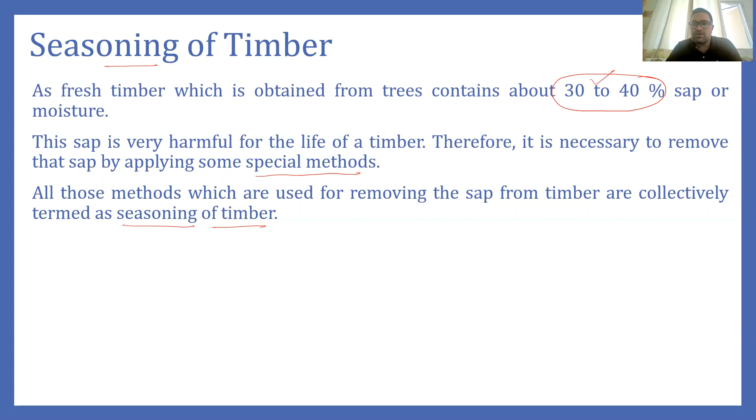So to remove this moisture, we apply some special methods. The process of removing this moisture is actually known as seasoning of timber. Seasoning of the timber can be done in two ways. It can be done in a natural way or in an artificial manner.

Naturally, what we do is we stack the timber logs in this manner from the ground, such that the air can be circulated through the timber logs. We keep this timber stack in the open ground, and when the air circulates through it, seasoning happens. For complete seasoning, it takes 3 to 4 months, and because it takes a lot of time, there are some other methods also which are known as artificial methods.

In the artificial method, one of the methods is called kiln seasoning. In kiln seasoning, there is basically an airtight chamber in which we put timbers in a stack, and then hot air is blown to that stack, and through that hot air, the moisture is removed. Generally, artificial seasoning takes around 4 to 5 days. So it is a lot of time saving, and the seasoning done by the artificial method is also very effective.

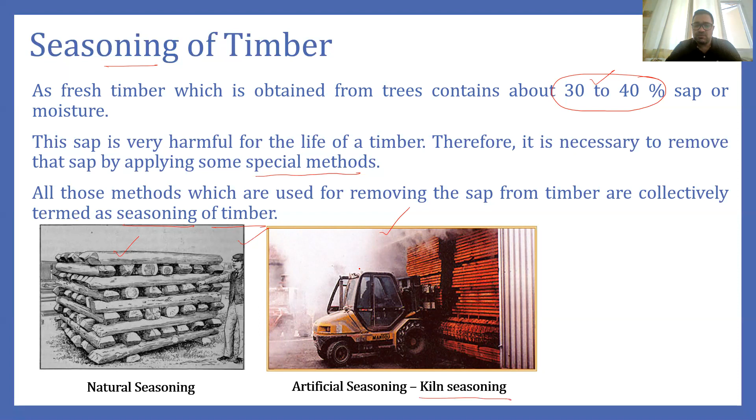Another method which also comes under artificial seasoning is electric seasoning. In this, timber is subjected to alternating currents, and through these currents, the resistance of the timber is measured. When the resistance of the timber is maximum, we consider that the seasoning of the timber is completed. So that is all about the seasoning of the timber. Seasoning of timber is very important from the point of view of strength: lower the moisture content, higher will be the strength.

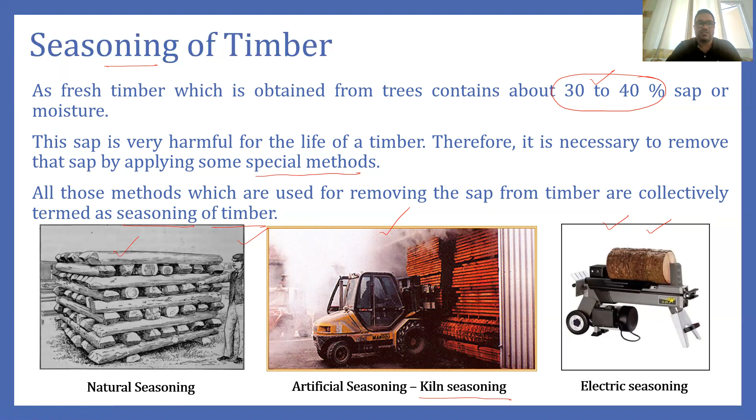Now coming to the classification of timber. Timber can be classified in various manners, and there are basically three bases on which we will be classifying the timber. One is on the basis of mode of growth, the second one on the basis of modulus of elasticity and extreme fiber bending stress. This second classification is most important for us for timber design, and the third classification is based on the seasoning characteristics. So first we will see the classification of timber based on growth.

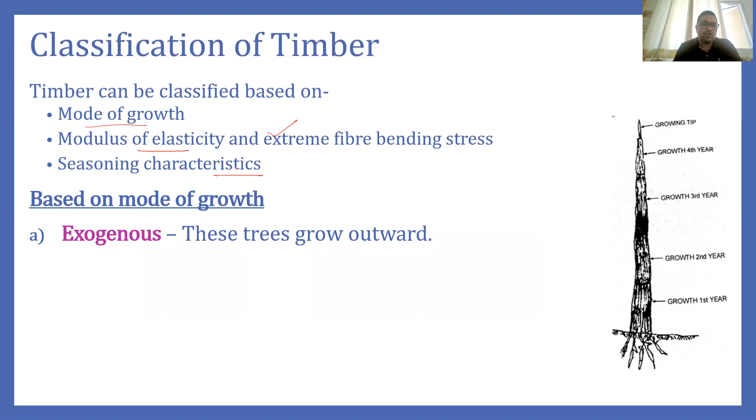Based on growth, there are basically two types of timber. One is called the exogenous tree. In the exogenous tree, the tree trunk grows outward, which means every year it grows in terms of annual rings. In the timber cross section, we have seen that there are very fine small rings. Those small rings are known as annual rings, because these rings form after 1 year. So when a tree grows outward every year by the addition of annual rings, that kind of tree is known as exogenous.

Exogenous trees further have two categories. One is called the coniferous tree and the second one is called the deciduous tree.

Conifer trees basically have softwood. Their wood is very soft, light in color, and the density of the softwood is very low. Similarly, the second type of tree is the deciduous tree, and these are the hardwood. Their appearance is dark and their density is high.

Well, if we talk about the coniferous tree, these are also known as the evergreen tree because their leaves don't fall, and also their leaves are narrow and pointed. And examples of conifer trees can be deodar tree, kail tree. So these can be the examples of conifer tree, mango tree.

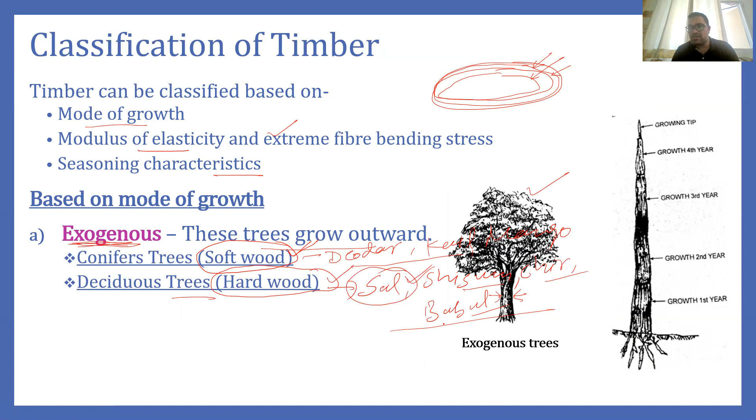an exogenous tree looks like this. In this you can see the stem. This stem grows annually by increment of the annual ring. Now talking about the next type of tree, which is the endogenous. Endogenous trees are the trees which grow inwards, which means at the start, as you can see in this example of an endogenous tree, the stem is thicker, and as time increases they grow upward, and at the same time their stem decreases. You can see here their stem decreases.

So this kind of growth is called inward growth, while in the case of exogenous the growth is increasing. Therefore the stem is bulky for exogenous trees, and for endogenous the stem is very light, very thin. Examples of endogenous trees are bamboo, canes, sugarcane, and palms. So this is the classification of timber based on the growth.

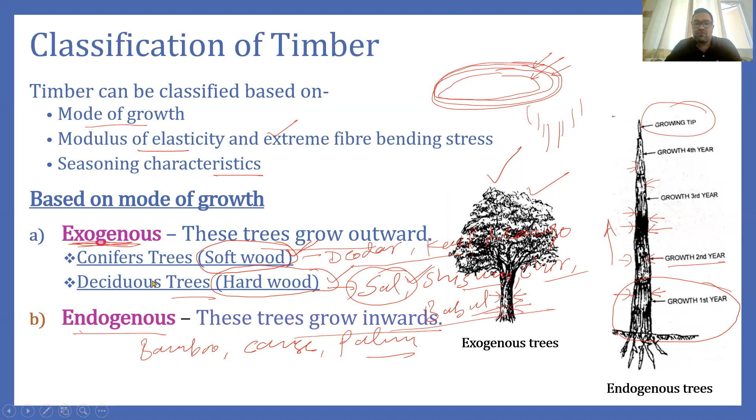Now we will come to the most important classification of timber from our point of view, where timber is classified based on its modulus of elasticity and the extreme fiber bending stress. Based on this we have three groups. One is group A. In group A, timbers having Young's modulus of elasticity higher than 12,600 Newton per mm square, and a value of FB higher than 18 Newton per mm square, are classified as group A timber.

Similarly, timber in the second group will have modulus of elasticity higher than 9800 Newton per mm square but lower than 12600, and that comes under the category of group B. Also the value of FB will be between 12 to 18 Newton per mm square. Similarly, group C has Young's modulus of elasticity more than 5600 and less than 9800 Newton per mm square, and the value of FB is between 8.5 and 12 Newton per mm square.

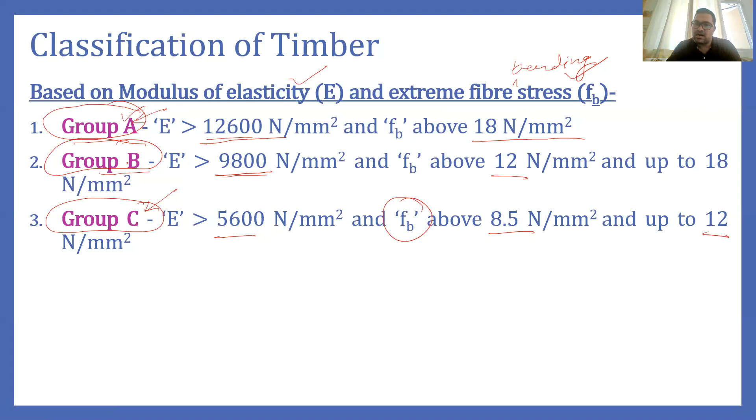So the first class timber will be group A, second class group B, and third class group C. The weakest timber will belong to group C, and the strongest to group A, because the higher the Young's modulus of elasticity, the higher the strength and stiffness of the timber. Now, the third classification is based on the seasoning characteristics. Based on this, we have three types of timber. First is class A timber.

Now, class A timber is a kind of timber which takes a lot of time for seasoning. These timbers are very slow and difficult to dry if the final product is to be free from defects, particularly cracks and splits. So they take a very long time for seasoning.

Similarly, the second type of timber belongs to class B, and these timbers show a moderate tendency to crack and split during seasoning. So the second type of timber, during seasoning, cracks and splits. I mean the fibers within the timber show cracks and splits. So this kind of timber comes under the category of class B.

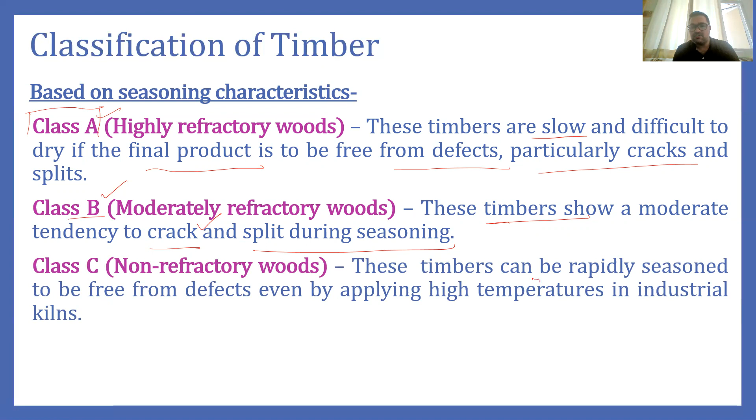Then we have class C timber. Class C timbers are timbers which can be seasoned very rapidly and are free from defects, even by applying high temperature in the industrial kiln. So they can be seasoned very easily, and they belong to class C or non-refractory woods. So that is the classification based on the seasoning characteristics.

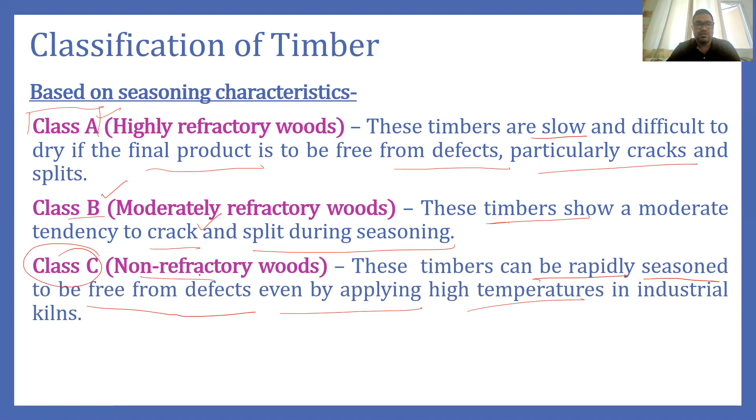Now coming again to a very important topic, and that is defects. Well, the strength of timber is affected by defects also, and there are various types of defects. Defects can be natural or artificial; during seasoning various defects occur which affect the strength. Similarly, defects can be due to termites, due to insects. So there are various types of defects, but here we will confine ourselves to some of the important defects which influence the strength of the timber.

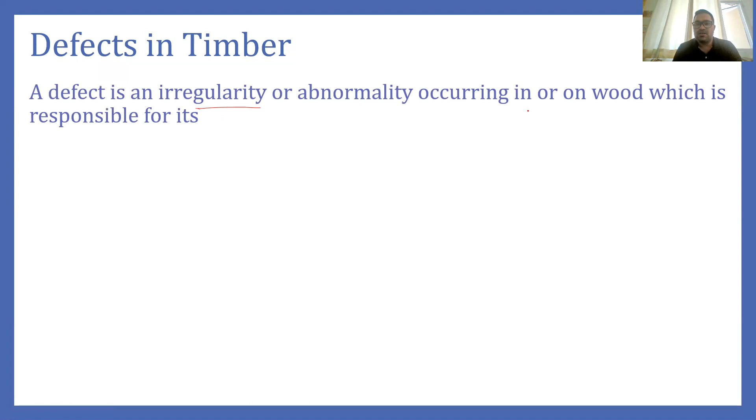So first we will see what a defect is. A defect is basically an irregularity or abnormality occurring in or on wood which is responsible for its strength reduction. Yes, defects reduce the strength, and they also lower the durability of the timber. They also lower the utility of the timber. It cannot be utilized properly if it has defects, and the appearance of the timber is very poor if it has defects. And defects are also responsible for the decay of the timber.

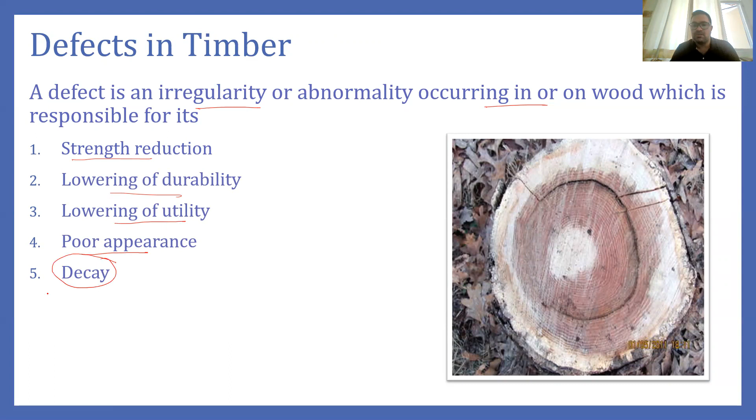So now coming to the first type of defect which generally occurs in timber. This defect is known as shakes. Shakes are basically the splitting of the fiber. The partial or complete separation between adjoining layers of tissues is called shakes. And you can see the shake here. So here you can see these are the fibers.

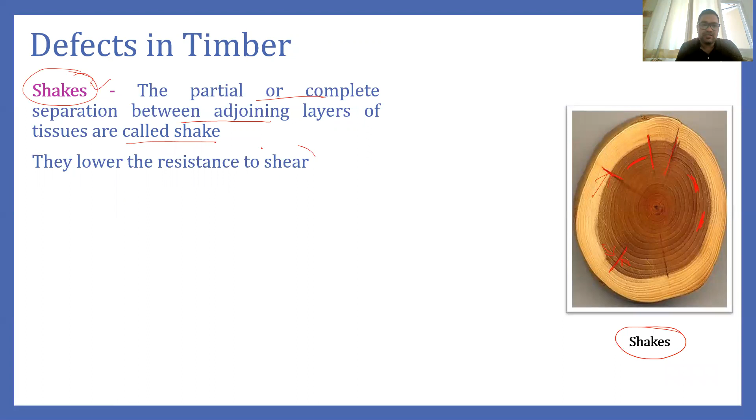So if there is partial separation like this between the rings of the timber; similarly, these lines are also shakes. In this you can see they are actually splitting this fiber along this line. So these are known as shakes, and these shakes are responsible for the reduction of the shear strength of the timber. So shakes affect the shear strength of the timber. So that is one important defect.

The second defect is the rindgall. Well, this defect occurs because, in the live tree, if any branch is cut in an irregular manner, then at the point where it is cut off, wood grows. You can see here, this is the branch and it is cut off from here. So what happens is the sapwood of the tree grows here, and it makes this kind of portion.

And this is very weak in strength, and therefore it is highly vulnerable to decay, because it can house various types of insects and various types of birds. So this portion becomes very weak. So that is also a defect, which comes under the category of natural defects. And this portion is called the rindgall.

Because of this new growth, which comes in the form of growth of the sapwood, it does not unite properly with the old wood which is already present here, which is broken because of the cut-off of the branch. So the new growth does not unite with it properly, and therefore a very important defect comes from this, which we will discuss in the next slide, and which is called knots.

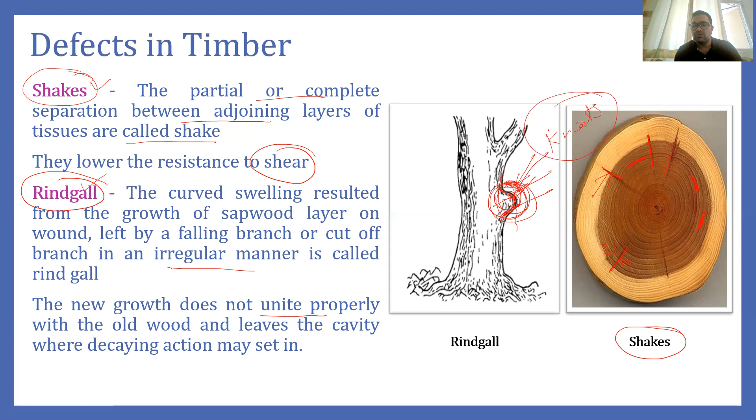So these knots are very much responsible for the reduction of the strength. We will discuss these knots in the next slide. Now, yes, as I said, we will discuss now the next defect, which is the knots.

And as I discussed how these knots are created, these knots are created because of the fallen branch in an irregular manner. So these knots here you can see, when you cut the timber irregularly, then what happens is the continuous growth is stopped. And because of this, this portion hardens because of the fallen branch, because the growth is stopped in this region. And some dark patches form here because of the discontinuity of the growth.

And you can see here, these are the dark patches. And even in the tree you can see this dark patch is basically the knot. And even this knot is present when we convert this tree into a piece of board. Even there also you can see the knot. Now this knot is very difficult to work out. Although this knot is very hard and compressive strength may be higher in this case, it actually makes working of the wood very difficult.

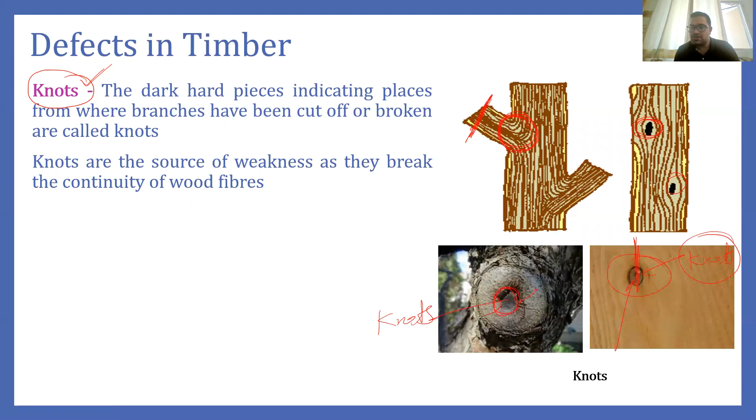Now what is the meaning of working? Working means it is very difficult to cut. If you want to cut from here, because this part is very hard, it is very difficult to cut, and therefore working is difficult in this case. So this knot is weakened.

This weakens the timber in tension. The tensile strength of the timber is weak because of the presence of the knot, but it may have strength in compression. So if you check the strength of timber in compression where there is a knot, it may show higher compressive strength, but the tensile strength of the timber is decreased because of the presence of this knot.

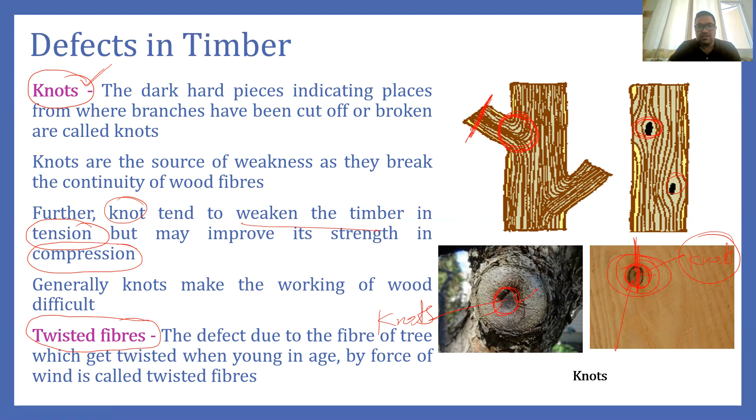So now the next defect is the twisted fiber. Now what is this twisted fiber? Twisted fiber is the defect which occurs in the tree. I mean generally in the forest, when there is a very high wind, or a very high force of the wind, what happens is some young trees get twisted, their stem gets twisted, and they are twisted at a young age. They grow in this twisted manner only, and the fibers of the tree also get twisted.

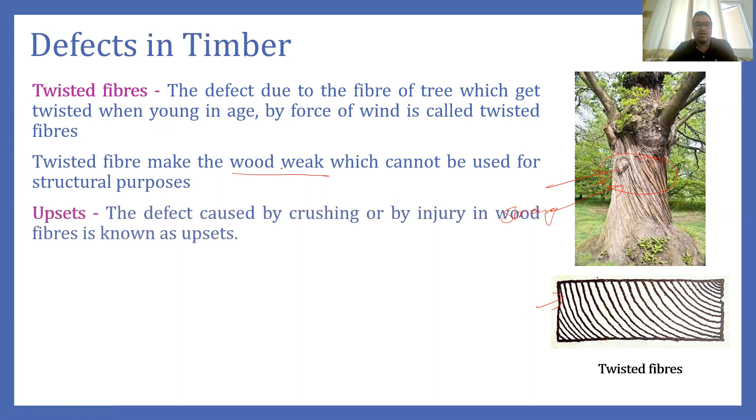Now, similar to this twisted fiber defect, another defect is called upset. And this upset defect is caused because of the crushing or because of the injury of the tree. Now, what happens is, again, if we consider the fact that in the forest there is a very high wind, and because of the high wind, say one tree has fallen onto another tree.

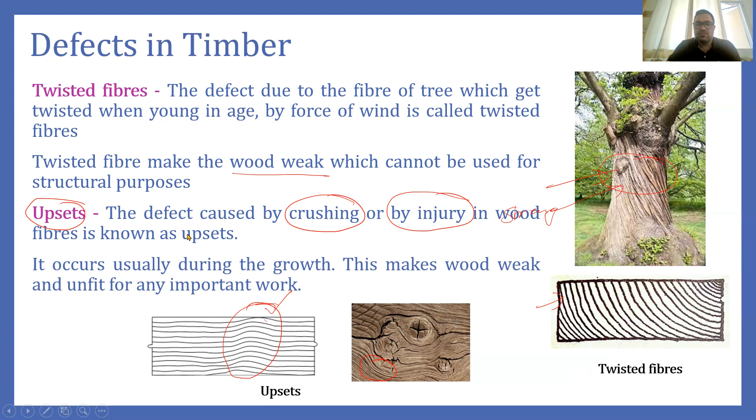So these are the important defects that we have discussed and that influence the strength of the timber. So now we will continue our discussion in the next part.